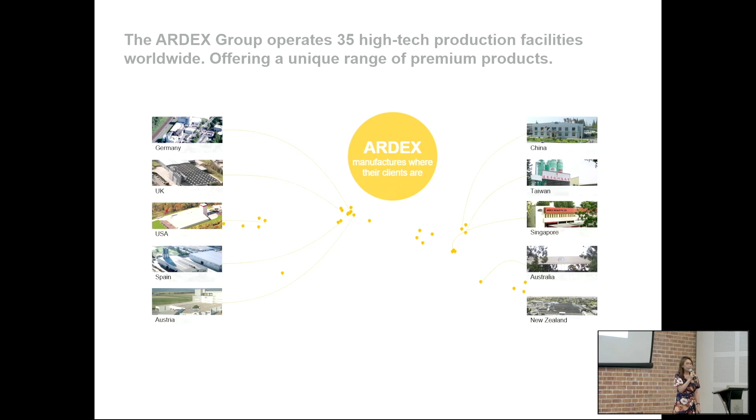These are our production plants worldwide - in Singapore and Malaysia we also have plants. For Southeast Asia, other than Singapore and Malaysia, we also have a production plant in Thailand. Under the ARDEX Group we have 18 brands, and ARDEX is one of the brands, while Quickseal is also another brand that we are promoting in Southeast Asia. So that's about ARDEX.

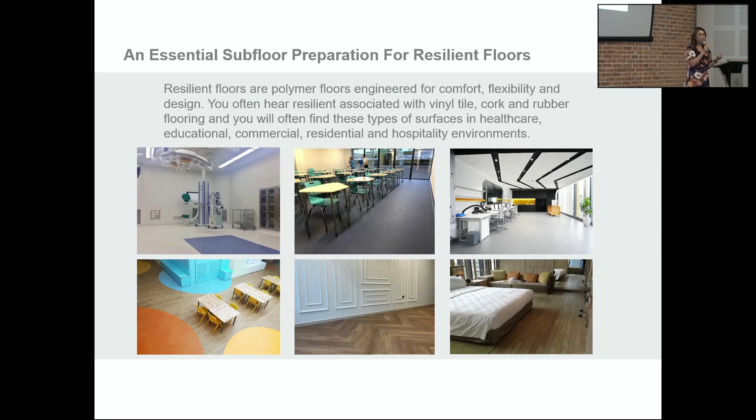Now we will move into the subfloor - what is this about the ARDEX flooring system? When it comes to resilient flooring, usually we think of those subfloor coverings like carpet, vinyl, linoleum, or even rubber, used most in industries like healthcare or institutional settings. But at this point, at the current market trend, vinyl has been widely used not only for healthcare, but also in residential, hospitality, or even commercial projects like office spaces.

For perfect floor covering installation, you need good surface preparation. You can have a very expensive flooring, but if you don't have good subfloor preparation, it may lead to failure.

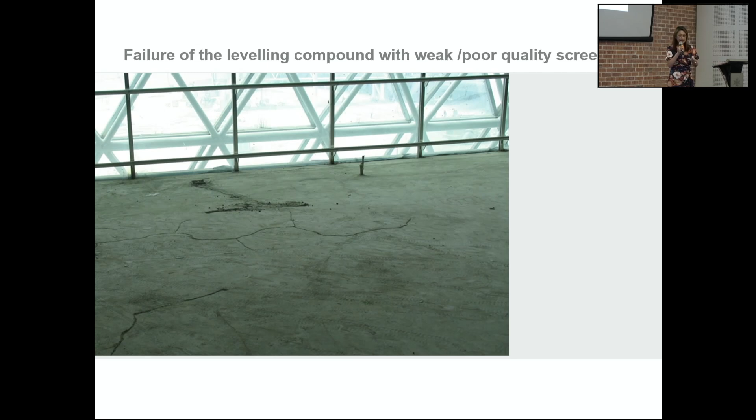This is from the airport project I've shown, the subflooring they had before they laid the vinyl. All these cracks and undulation make the flooring surface uneven, and it will cause potholes after some time.

So there are 5 key factors that we should consider before we lay the resilient flooring.

The first is that the substrate is flat. You need a flat subfloor. When we say flat, it also considers in terms of sound, non-hollow, and free of contaminants, which must be removed. The subfloor should be firm and stable.

Whichever flooring has cracks and holes, it should be repaired before you conduct subsequent receiving of the floor covering.

But all these factors can be resolved easily, because they can be seen from the physical condition when we visit the job site.

But the last point I'd like to highlight is about moisture. When it comes to moisture, it may not be visible to your naked eyes, so you have to engage a flooring specialist to check whether the subfloor is dry or wet.

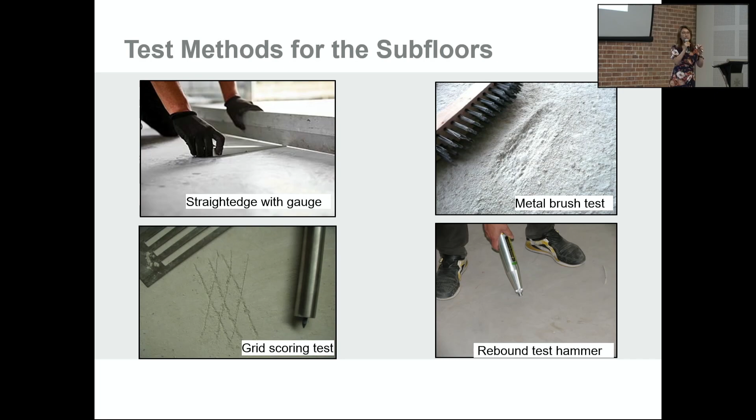This has to be engaged by either the installer or the flooring specialist. They should be equipped to do such inspection before they accept or lay the floor covering.

For ARDEX, we are a flooring manufacturer that produces self-leveling materials for our clients. So in order to have a successful installation of your flooring, the surface preparation is really important. You must have a solid and...

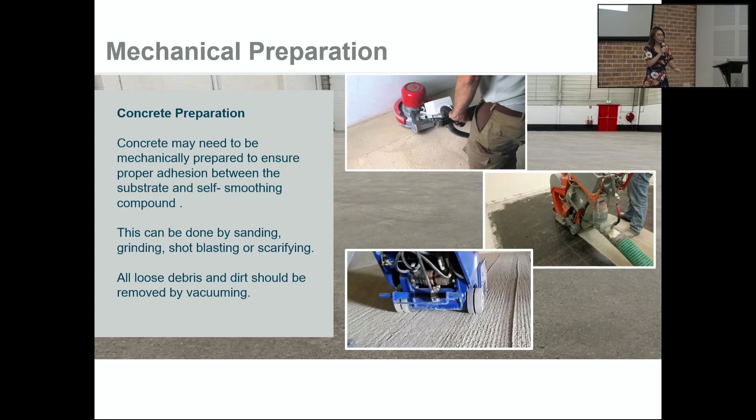Okay, so we will talk about the cement sand screed. I think this is a common component that will be seen whenever you deal with flooring installation. For floor screed, it's actually suitable for all kinds of application. It could be a coating installation, tiling, or wood flooring installation.

But all this has to be done according to the floor covering manufacturer's instructions or guidelines. In Southeast Asia, I suppose the bonding screed is the most common screed topping, or how we actually prepare the subflooring. Or maybe I'm wrong, but I suppose it's a bonding screed. What is this bonding screed? It's actually a screed topping material that will adhere or sit onto your concrete slab with full bonding.

And in some European countries, they actually have another type of screed called unbonded. With this kind of unbonded screed, they will use it when the concrete slab is, how to say, lightweight. When you do the unbonded screed, you need a thickness to have the full loading points. For the bonded screed, the minimum thickness is only about 25mm.

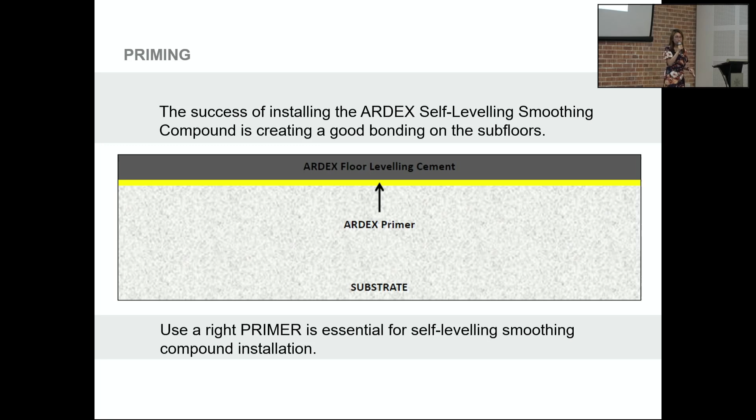It's not meant only for self-leveling, but when it comes to epoxy, PU, whenever you do a thickness of 1 to 2mm, sometimes you will find your floor with all these pinholes. It's because your floor is not being sealed. So sealing the floor will help give you good adhesion and prevent the moisture suction. All this pinhole issue is due to moisture suction.

Also, it will help increase the flowability whenever you are receiving cement, epoxy, or PU coating. It will also help whenever you have a surface that is sealed with the primer - it will help to have a more consistent drying of your cement finish or even the epoxy or resinous floor coating.

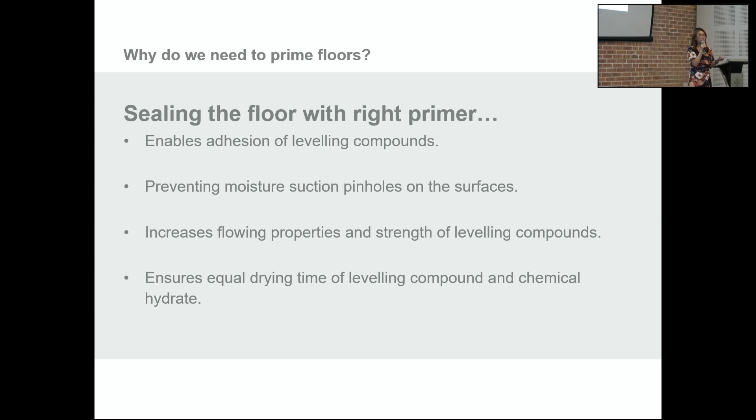So once you have primed your floor, you may need to know whether your flooring is dry or has a high moisture content. For checking whether the floor is structurally sound or has good wearing hardness on the surface, it is easy to check. But when it comes to moisture, you can't see it with your naked eyes, so you may need the test equipment to check your subflooring.

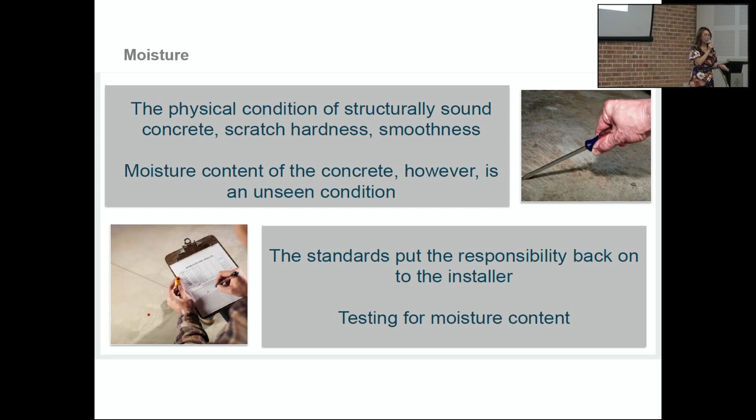Whenever you go to a place like an enclosed room or basement, definitely the moisture, the RH, tends to be higher compared with open space. So all this check will be taken care of by the installer.

So always check, measure, record, keep the moisture content results, and show them to your client. If the floor has high moisture, you will have this issue - your floor covering will be blistering, or the joint will be lifting up.

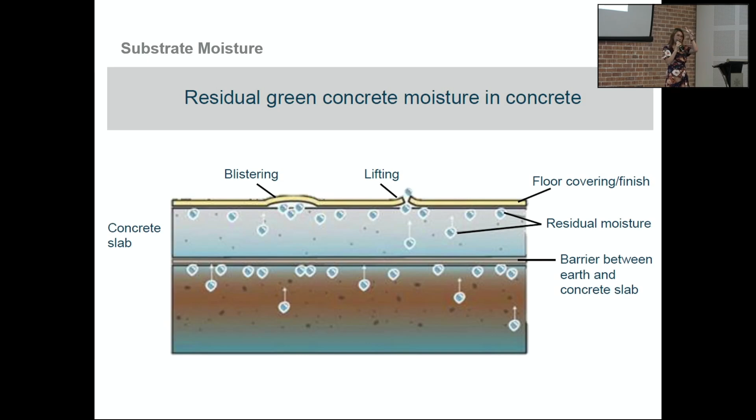But whenever you have the concrete slab or screeding, because the material uses water to mix, the moisture will evaporate during hydration. So if you don't have a dry screed, then the moisture will try to find a way to escape out. If you are laying your floor covering too early, you will have all these issues. So if you don't have time, you need the moisture barrier coating or solution.

Yeah, so this is the vinyl sheet seam joint failure due to moisture. You can see the joint actually lifting up, or you will see the bubbling on your subflooring.

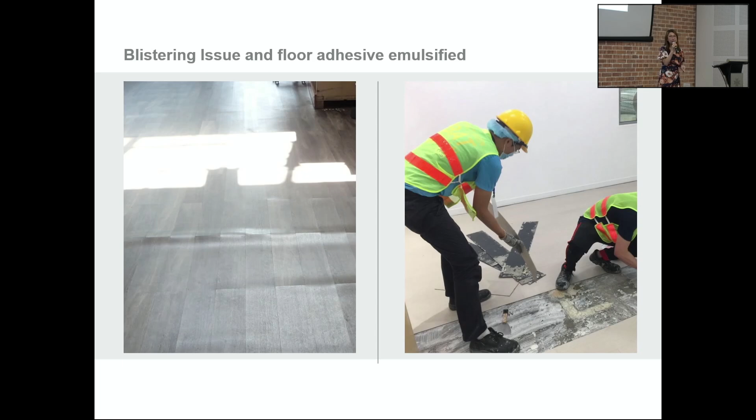And all this floor covering is installed with acrylic water-based adhesive. So if you have excessive water or moisture, this will be the problem - all the adhesive will get emulsified. So these are the problems, and we are here for the solution.

We need an effective moisture barrier coating system that can resolve your problem, be installed and protect your soft floor covering. With this moisture barrier system, it helps to suppress the moisture vapor transmission. It's not a waterproofing - you still need waterproofing whenever you need a waterproofing product. This is a moisture barrier system.

So it also acts as a hydrostatic pressure resistant waterproofing membrane, but for hydrostatic pressure. It's to prevent water seepage, dampness, penetration through the interior floor or wall, preventing moisture from the negative side. So with this moisture barrier, it will also help to reduce and eliminate efflorescence issues - it acts as a barrier.

So these are the basic things we should consider when laying the floor finishing. As I mentioned, we need a concrete or cement screed before installation, and you need a dry floor. This follows the British standard that you need not more than or equal to 4%, or the RH within 75%.

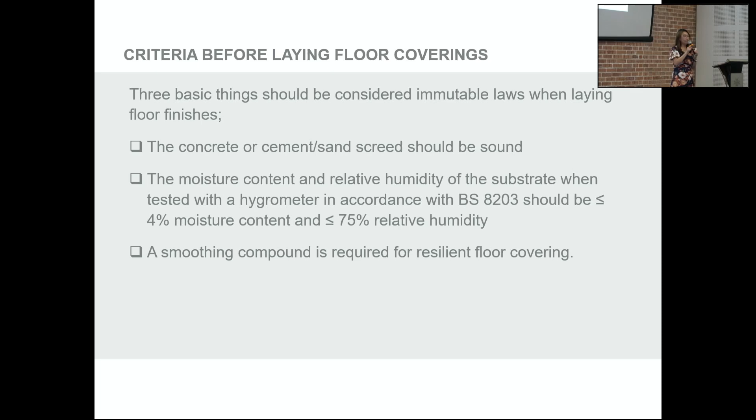So if you've already resolved the screed, you have a perfect screed and a dry floor, then you need a leveling compound. Why do we need leveling compound? This is also according to the British standard that we need a flat, smooth surface when it comes to finishing, or for receiving another floor finishing.

And there are 3 classifications. I believe all of you are familiar with this floor regularity, surface regularity requirements. So there are 3 classifications, and we have SR1. SR1 is how we actually measure to understand the performance. This is where we use the straight edge, the 2-meter straight edge, with the gauge, so you're able to check the difference from the edge and the floor surface.

So whenever you find there's a 3mm difference, do you think we still need to level the surface, or is it good enough? In actual fact, you still need to have a topping, the leveling compound, at least 5mm, to correct the surface flatness.

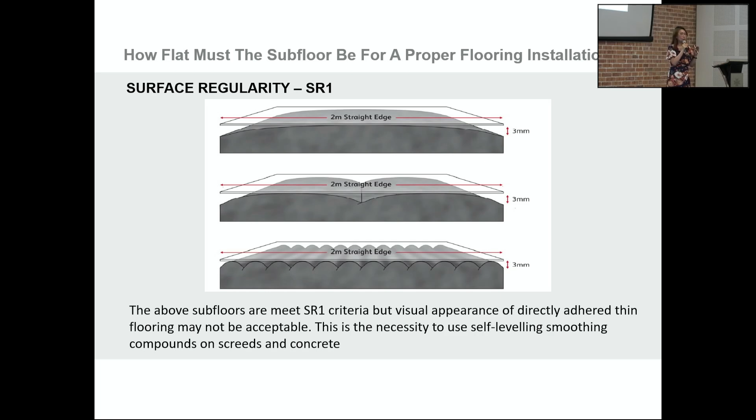So this is the scenario where you already have the SR1 surface. You think 3mm is not so critical, right? You think it's the best floor standard already achieved, SR1. But when it comes to this site condition, if you're installing a 2 to 3mm vinyl, you will see all this undulation, waviness on your surface. So this is where the self-leveling material plays a very important role as a product or solution to your projects.

So I keep saying self-leveling, self-leveling. What is this self-leveling? Is it a product that self-levels itself on the surface? No. Self-leveling product is actually a polymer modified cement that has very good flow properties. I believe you all remember the photo I showed with primer and without primer - with the primer, the material can actually spread evenly onto the surface. So that's how we describe the self-leveling product that has very good flowing properties.

With these flowing properties, the cement can provide a level, flat, smooth surface. This is where you need this product to support your resilient floor, to get the greatest performance. So it's ease of application - the product comes in a bag, you just mix with water. At the job site, in this area, you may need just 3 to 4 people to do the installation, and it requires less labor.

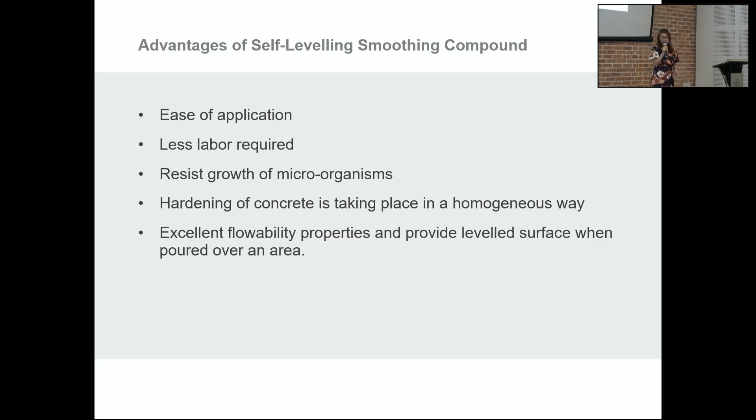So again, with this good flowability property, you're able to provide a level surface when poured over an area. And this is just a simple process I'll show: we need to surface prime, prime the surface. Then we get a bag of the leveling compound and mix with water, and the product will be poured onto the prepared floor surface.

Then we just use a trowel, or we also have some tools that help speed up the work and installation, so you don't need to bend down or kneel down to do the installation. You're able to finish this floor within maybe 2 to 3 hours. So it's also a cost saving to your client.

So this is the importance of this self-leveling compound. It helps to prevent the wavy unevenness of your flooring, and actually prevents the unsightly view or aesthetic of the surface. You can see this on the left top.

Wherever you have excessive wear on a high spot, you'll tend to have a lot of abrasion. So after some time you may find your floor looking like the right top of the image. It will also prevent the risk of cracks and potholes. Even with a very tough flooring finish, it may still cause cracks or potholes over your floor covering.

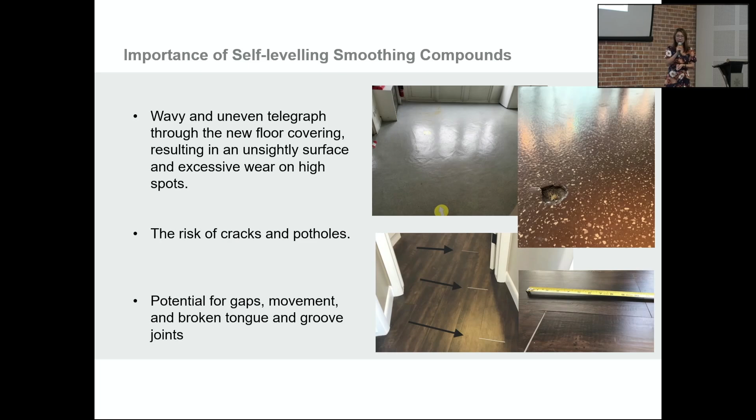Also when it comes to LVT, you may have the potential of gaps between the LVT, or maybe wood panel, wood plank or LVT plank, due to movement. This may cause the tongue and groove of the LVT to break. So these are the problems you will see if we don't install the right product on your floor surfaces.

So why are we here? Because we are German. The self-leveling product we use is based on German technology. The product is very versatile, able to receive all kinds of substrate, like concrete, wood surface, tile surface, or even metal surface. It has very good surface coverage, with minimal consumption, good flowing properties, and self-recovering.

This self-recovering property comes into play during installation. If the product doesn't have good self-recovering properties, whenever we do a trowel pass, it may leave a trowel mark on your surface, and this will cause unevenness again, creating more lines on your floor surface.

So whenever you are installing a thin floor covering, it may also reflect onto the surface. Because we use a special engineered polymer material component, it helps to have very low tension and shrinkage on the mortar topping that you are laying over. It dries fast, and even though it's by hydration, it's able to open for foot traffic in a very minimal time, like 2 to 3 hours.

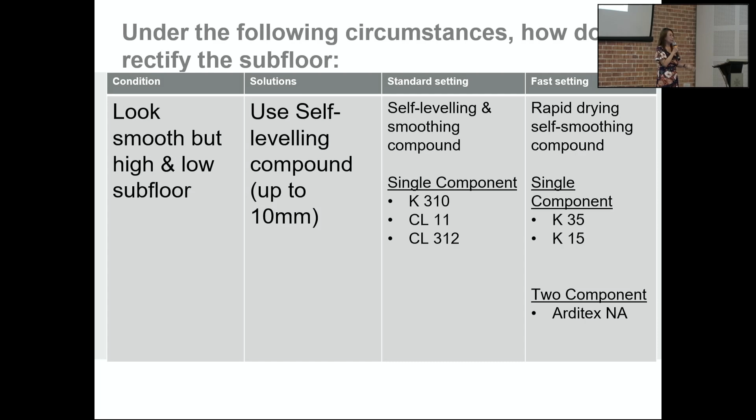You can actually use the self-leveling material, and the product can be applied in one application up to 10 mm. We have a standard setting and a fast setting. With the fast setting, you are able to complete your job within a day, and install the floor covering the same day after laying the self-leveling compound.

And if you have a rough and uneven surface, you can consider this self-leveling screed, or what we call base mix. You can apply it up to 35 mm without weight, same as before. After 6 hours, you are able to allow for foot traffic.

So if you are installing a thinner floor covering, like 2 mm, we suggest you go with another layer of self-leveling material to create a smooth surface on top of the self-leveling base mix.

We also have a product for when you need to treat depressions caused by hacking or some repair work. You can either use the same leveling compound added with some additive to create a paste form for touch-up patching, or we also have a product where you just mix the material with water as a fast-drying patching mortar. I'll show this in my later slides.

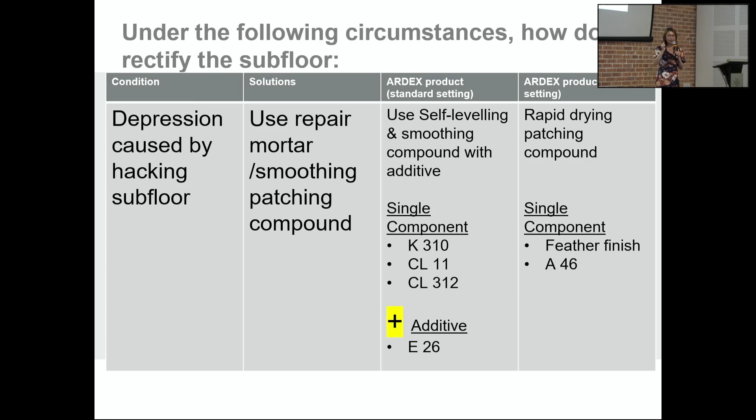So this is an undulating floor, due to poor screeding work done. We actually have the material for this—again, it's a base mix—that allows you to speed up your installation, your project, with minimal time.

Okay, so the last condition is when your floor has cracked or is hollow, but you don't have time to re-screed. We have the solution for you. You can actually use epoxy, the resinous solvent-free product, to treat the flooring or consolidate your floor with the epoxy material.

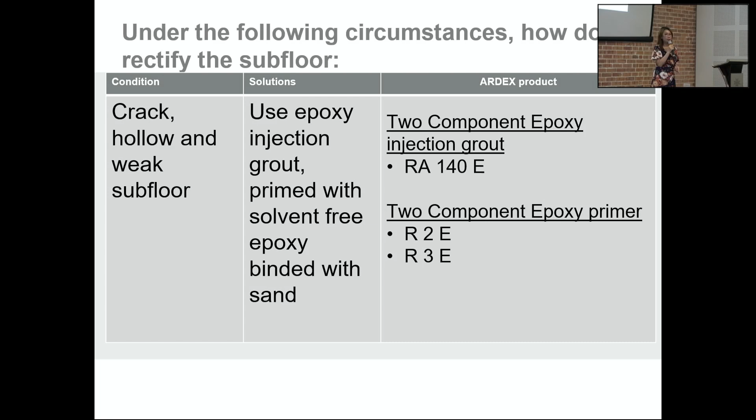Okay, so the flooring parts we already finished. Now I will just quickly run through about the flooring adhesive. In the market, this adhesive is used for vinyl, rubber, linoleum, and wood flooring.

In the market you may see the most common adhesive being used will be those water-based acrylic, and modified silane polymer, which is quite recent technology. But even though it's already in the market, some of you already know about the MS adhesive. This is also used for those LVT or rubber for semi-exposed areas, but because it comes in one single component, it actually helps to speed up the job.

In the past, when it came to external installation, they may only recommend epoxy or PU base adhesives. But with this modified silane, it helps a lot because it's able to have quite good performance as a resinous PU or epoxy adhesive. So the two-component adhesive is still widely used, especially for external applications or even wood flooring, solid wood, or engineered wood. They may still go with the PU adhesive.

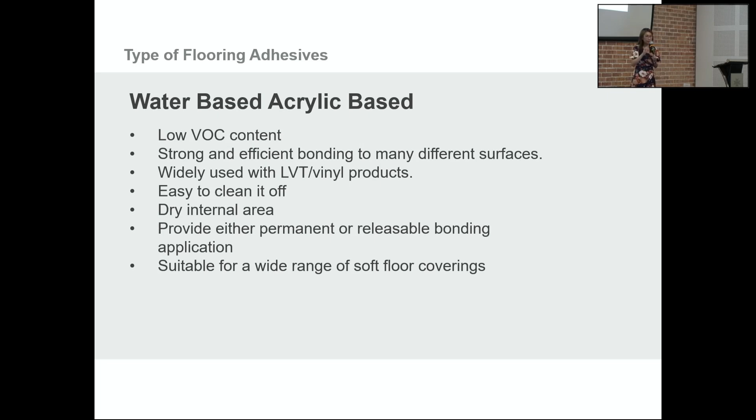And for this water-based acrylic, you can actually have two methods of installation. Either it's wet set, which provides a permanent installation bonding application, or you can have this releasable method, which means after laying the flooring adhesive with the floor covering, you're still able to reposition, or replace it if you think there is a defect onto your LVT. This releasable bonding application allows you to do a replacement or change, like with a carpet.

So this is the modified silane polymer base. It's one component, ready to use. As I mentioned, it has very similar properties to the PU or epoxy resin adhesive. You can use it outdoor, semi-outdoor, or in high solar condition, heat, because it's weather and moisture resistant, and you can also use it in the bathroom, a wet area. Also, it gives a very low VOC content that is suitable for a wide range of floor covering installation.

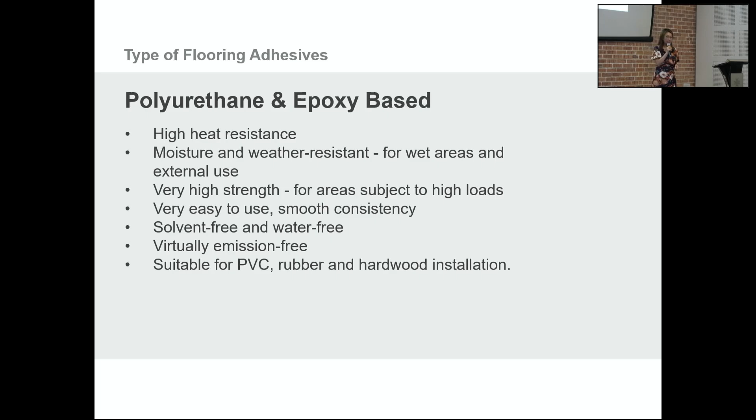So the PU epoxy always comes in two components, and it's also moisture and weather resistant, so you can use it for external and wet areas. The difference is you need to mix the two components to have a chemical bonding. If you just use one component of this, it won't be cured. So this is much more on the heavy duty side when it comes to heavy duty usage.

Yeah, so these are some checklists, but always when it comes to flooring adhesive recommendation, you will actually get guidance from the floor covering manufacturer. They will have a guide for you when it comes to specification writing. But as an adhesive manufacturer, we also have knowledge for the recommendation.

So if you have a project, you can just let us know what type of floor covering you are using. From there, we are able to advise you on the adhesive to use.

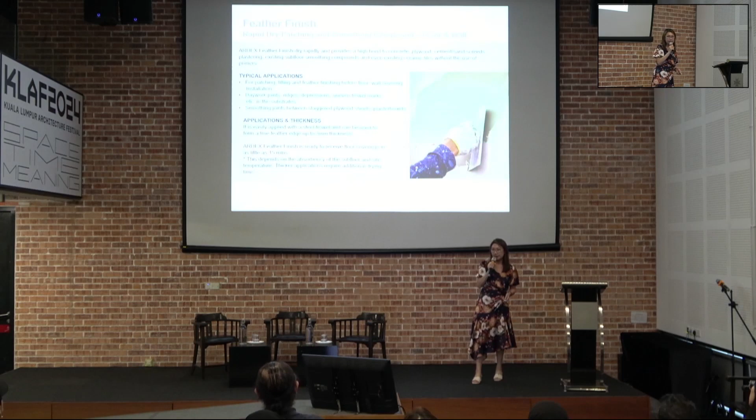So this is the patch and repair product. This is used for depression areas where you have hacking, or maybe your floor, the self-leveling material, is not installed the right way, which means you don't have a good surface, or you never primed the surface well, so you find a lot of pinhole suction. You can use this to patch, no need to relay the self-leveling compound. This is the product you can use to resolve pinhole suction areas.

So we also have another repair mortar. This is a rapid hardening material where you can do the installation, repair and resurface. And in a quick time, you are able to continue receiving painting or coating over the surface. You can actually use this product to build a ramp, because this material can be installed from 2 to 30 mm in one application.

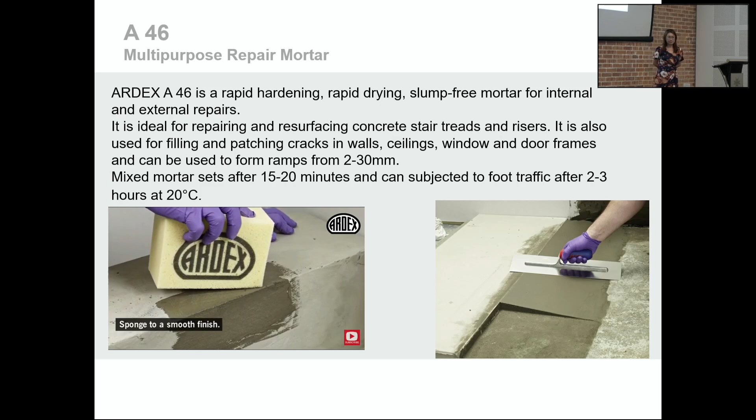So it's a quick repair method and solution. It dries pretty fast. Within a few hours, it actually gets set and dry.

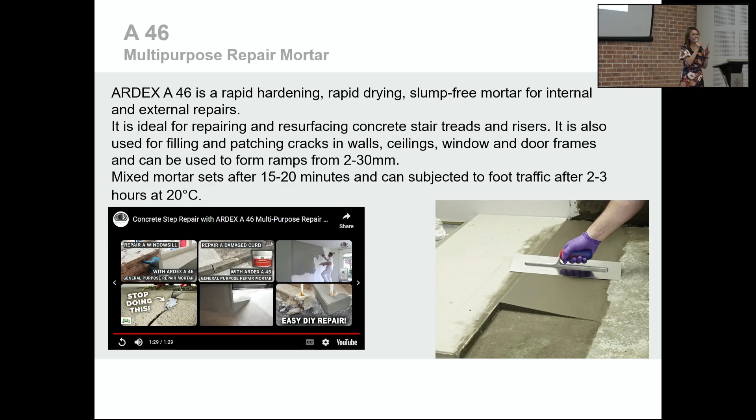And you can actually see this product. You don't need any primer, but you still need to surface prepare the area to have a good bonding.

Okay, so I think the last part I would like to share is about the case study we have. It's about the moisture problem that we actually helped our client with, this moisture barrier, to resolve the moisture issue that they have.

There are 2 projects. Actually, one of the projects we are proposing the WPM 300, which is an epoxy bridge bonding coating. Also, this is a two-component material. It's a water-based material that is safe, also used for waterproofing for the potable drinking water tank.

And it can be applied to a damp surface, okay, or freshly laid green concrete, because the material itself is able to suppress the moisture vapor from the surface, and it's also a green certified material.

And we have actually worked on this Sigma project, and the client has come to us directly, where they have a laboratory, about 2,000 square meter project in Singapore at this Biopolis. They have been doing the screed for 2 times, and they have wasted 6 months. The main concern was not being able to deliver the project.

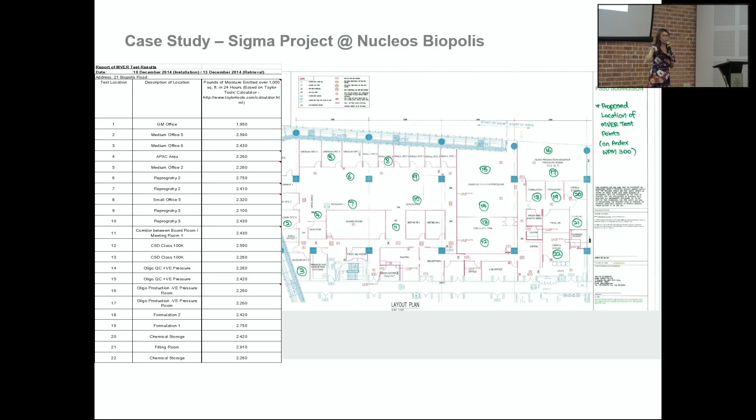They had, I think, 22 points over the 2,000 square meter. So after laying the WPM 300 system, we helped the whole entire floor achieve below the standard 3 pounds emission, moisture emission rate.

So actually, if you can see from the right top image, the right side image, all the readings are actually below 3 pounds. This is the MVER standard, where they need the rating results to be below 3 pounds.

So before that it was actually 5 to 6, but after laying the moisture barrier, it actually helped to suppress the moisture from the screed. And we also wondered why the screed could not be cured even after 2 months. We found it was because the water table surrounding was pretty high, and also because under the floor is actually a server room. They have a 24/7 aircon on. So it was all these factors that caused the screed to not be cured and dry, and it was always in a wet condition. That's where we came in to help resolve it.

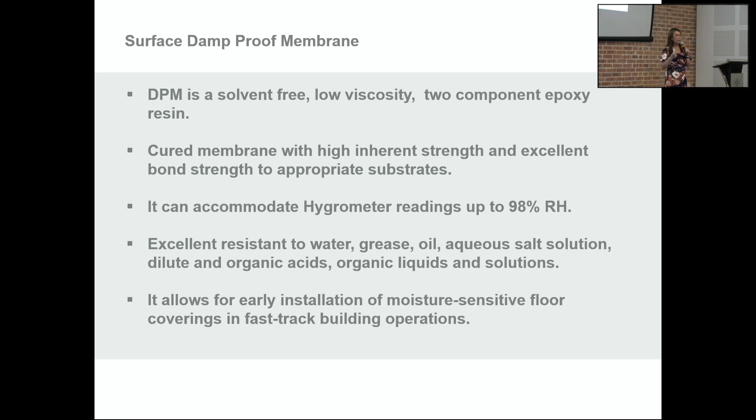So this is more for where you have a very high RH or higher moisture content on the subfloor, you can actually go with this material. And it's also a chemical resistant product, because it's solvent-free, in terms of performance it's definitely slightly higher than the water-based type. So this is the project case study that we have in this Tetra Pak office.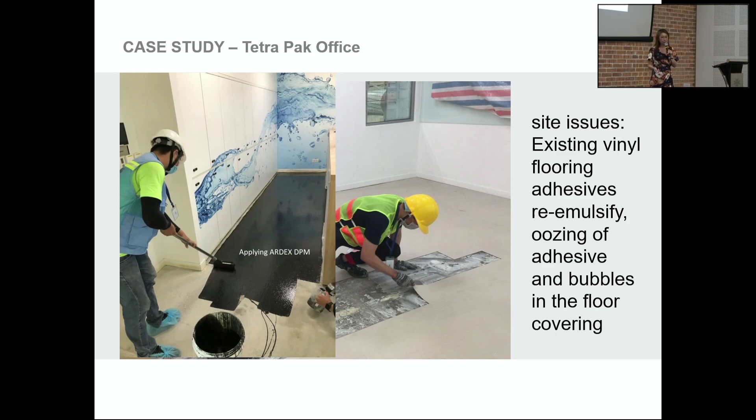So that's where we actually came in to help them resolve it. We applied the DPM over the subflooring, and we relaid the leveling compound after this damp-proof membrane. With the damp-proof membrane, it actually helps to resolve and suppress the moisture from the ground. This project's flooring is on the ground floor. The moisture is basically from the screeding where they cast, and they don't allow curing time.

Okay, so this will be the last part of my presentation. I will share some project references that we have. What you have seen is basically projects from Singapore, but we are also present in Malaysia, where our Malaysia team has worked with our customers to supply our leveling compound flooring system to most of the healthcare projects in Malaysia also.

So you can see this is the Woodlands Health Hub. It's the largest project that we had in Singapore for the healthcare industry. Maybe for Malaysia it's not that big, but for Singapore, 120,000 square meters is considered big for us. I'm not sure what's the usual project size in Malaysia, but this is considered the largest healthcare project we have in Singapore.

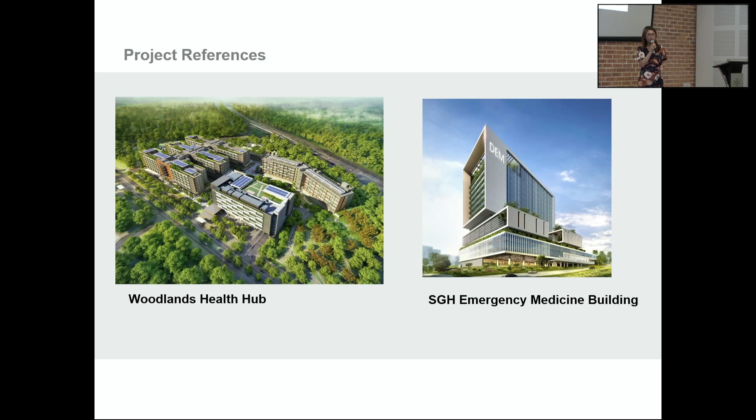So we also supplied the SGH emergency medicine building - this is about 6,000 square meters. We have Sengkang General Hospital, also about 60,000 square meters. And National Heart Center is also about 45,000 square meters. The full floor solution is from ARDEX. So Outram Community Hospital Integrated Care Hub is also using our system, the size is also about 45 to 60,000 square meters.

Other than healthcare projects, we also supply our flooring system to commercial projects, like Tekka Place - this is a shopping mixed development, a shopping mall combined with residences. We also supply to the Shopee office with the vinyl flooring system, and IKEA. And also this will be a museum recreation project industry, the Museum of Ice Cream. The flooring is using vinyl.

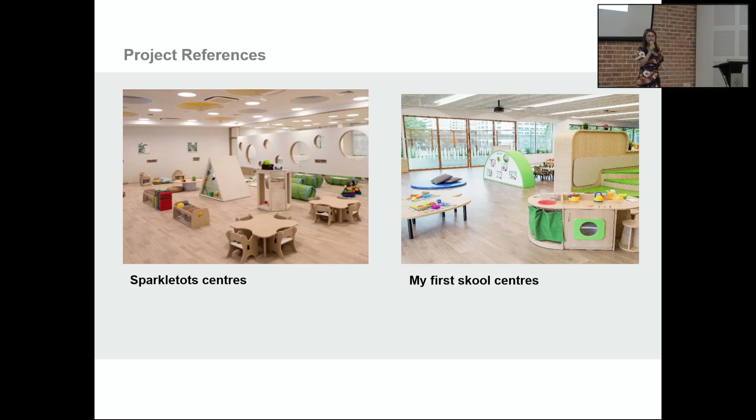Okay, and we also supply to educational projects. We are actually for the childcare - it's island-wide for all the Sparkletots centers and My First Skool centers in Singapore. We also supply to the Canadian International School for the new kindergarten wing. And we also work on hospitality projects, hotels, where now LVT wood flooring is the trend for hotel projects.

So, yeah, this will be the summary. To summarize, we need a flat, smooth surface to give the greatest performance on your resilient flooring. It will give you a very solid foundation, and it will prolong the floor service for your projects, because it gives you fast, repeatable, reliable performance on the flooring. So you need a smooth and level substrate in order to achieve a very flat, mirror-like finish on your projects.

So that's all. I think the Q&A will be later, right? Yeah, can. Thank you very much.

Thank you, Ms. Emily. I think we give another round of applause to her. The interesting thing about it is the scale that she mentioned about Singapore being 6,000, very big. And Malaysia, I think, is the size of Sekolah Menengah and Sekolah Rendah. So we should be grateful - actually we do a lot of big size projects also, but not of that quality.

So can we proceed with the lucky draw? Okay, I hand it to you. So who is going to pick? Okay, you select, then I read the number. How many do I draw? 8, is it? Okay, how many? No music, huh?

Okay, nice handwriting. Mazli Lajis, Architect Reka Consult Sdn Bhd. Can you come forward? Oh, he's up there. Oh, he hasn't arrived yet. So should we read the second one?

Then we proceed. Okay, I forgot this is an architect event, so everybody has good handwriting. So the next one will be Muhammad Ashraf alias HSA Architect. Then the third name, very simple, Zaid, GSD Architect.

And the fourth, Muhammad Fikri bin Muhammad Saga, Muhammad Saufi, Johari Architect. He's here. Wow. Next time we should sit at the top.

All right, the fifth, Mr. Lee Tiong Ki, L3 Architects Sdn Bhd. Okay, the sixth, Mr. Ui Ai Keng, AK Ui. Wah, this one the boss himself gets it. The seventh, second last, Jane Lee, Miss Jane Lee, MOA Architects. Oh, again on the top.

Architect Chan Seong Aun. So I think when I was sitting just now, our senior architect needs no further introduction. If you look there, he is a president of PAM 2013 to 2015, right? So I think if we have a very, very senior architect talk about Gen Z technology, which is BIM integration, the first word that comes to my mind is you have to listen, because technology is the most resilient knowledge. Talking about COVID, post-COVID, pre-COVID, a lot of people talk about the only industry that shows the most resilience is adopting technology.

So let me read, besides becoming a past PAM president, I will read as a protocol: Architect Chan Seong Aun graduated with Bachelor of Architecture Honors and Master of Architecture Distinction from Victoria University of Wellington, New Zealand. He has more than 20 years of working experience as a professional architect and is founder of the firm Architect Daya Seni Sdn Bhd.

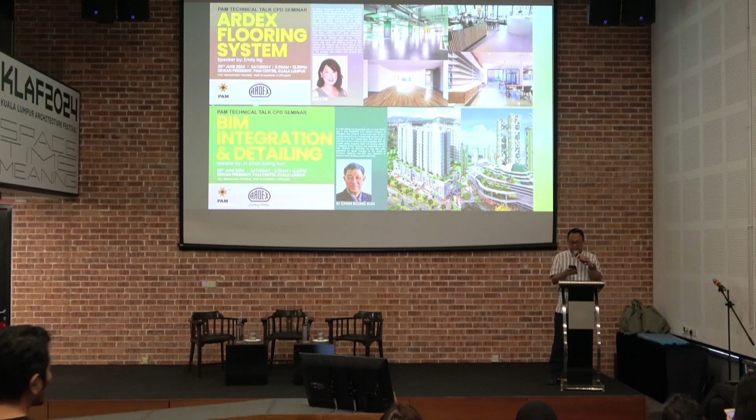Any of your staff here? Oh, okay. So no wonder there's a lot of people, it's free.

As principal architect of ADS, he has completed high-rise condos, hotels, shopping malls, and housing projects in Malaysia, China, Vietnam, and Indonesia. He was past PAM president 2013 to 2015. He has also been appointed a board member of the Board of Architects Malaysia, Lembaga Arkitek, LAM, 2011 to 2021, and president of Malaysia Green Building Council, MGBC, 2019 to 2020.

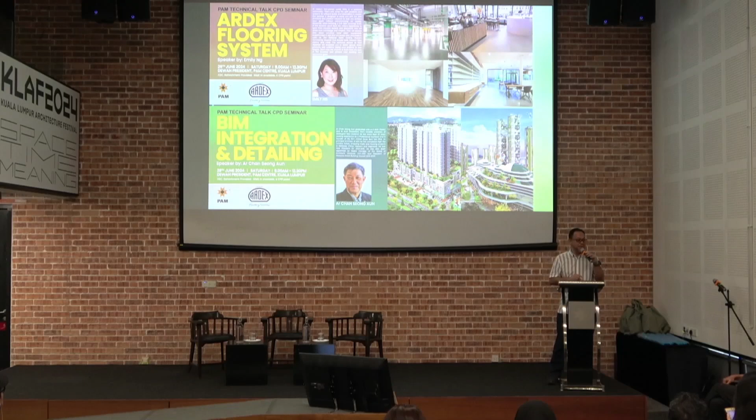So I think he has long established experience. I very much like to hear your talk also, because the title is integration. So that is the one we need to share. We no longer talk about BIM alone, we talk about BIM integration. So what is the definition of integration and detailing? Only Architect Chan will be able to inspire you.

So I do not want to talk a lot about the synopsis, I think everybody should know that. Sometimes a lot of comments come, we talk too much about awareness, BIM 101, BIM 101. So we have him today putting together integration and detailing. I hope it will inspire all of you to embrace more of BIM as a supplementary service to your fee, because BIM is actually able to produce additional fee for ACP.

So hopefully, Architect Chan, you have the floor to inspire all of us. And then after that, we get another lucky draw. So I keep insisting a TV, so hopefully our audience won't run away because of that. Thank you very much. Okay, Mr. Chan.

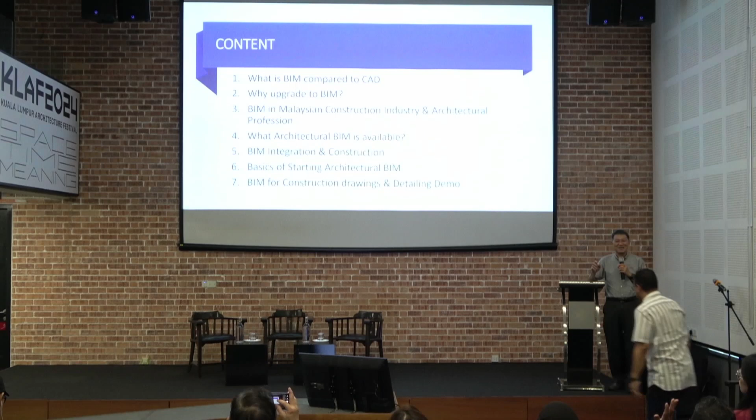Okay, this is the content. I've just covered what is BIM. I think maybe before we start, can I have a show of hands? How many of you have bought the BIM program and are using it in the office? Can you put out your hands for me, just to have a quick look. 1, 2, 3, 4.

Oh, okay, it's like the industry standard, 20% is already using the BIM, and the other 80% still undecided, want to go, don't want to go.

I can understand also why. In today's economic climate, BIM is not cheap. Price is, I think, 8 to 10,000 a year, just the one license alone. So I think you all understand also.

So maybe before I start, I better make a disclaimer. The seminar I express here is purely my own view. I don't want to get PAM into trouble.

Because there are a lot of issues many of you are facing today, especially medium, small offices also caught already now. Autodesk likes to write letters to you - we understand that you have been using my license, my software without license, please send me a list of all the software you have in your company, I want to audit it. So straight away I gave it to my...

IT manager - now I have an external IT source. He maintains my server and also my computers, so he put a nice big firewall in front of my office already now, so anybody who wants to get in also not so easy already. Last time they used to try to track us, I think they are still tracking us right now to this day.

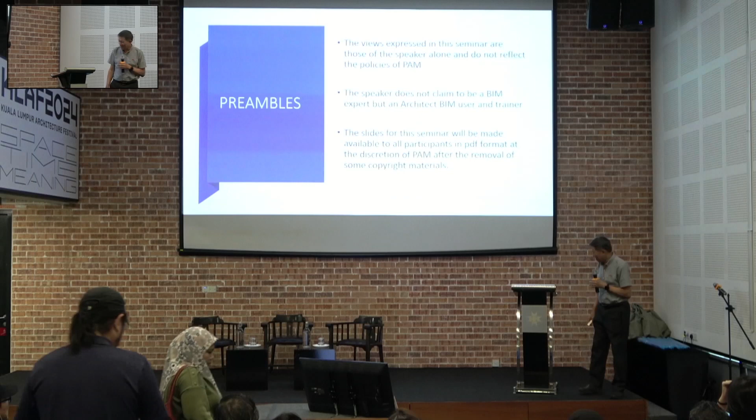Clients approach me, then they say, I want - because this JKR project, JKR wants a green consultant, they want the project must be run on BIM. Their idea of BIM must be Revit only, anything else is not BIM. So very funny. So what happens? The client employs a BIM consultant, so a BIM consultant will do all what he does.

His BIM is even older than mine. My Revit is 2020, I think. That year, they stopped supporting the perpetual license. Now they are only supporting the annual license. So mine, they wrote me a nice letter saying, sorry, we regret to inform you, your version of Revit is no longer supported by Autodesk. Wow, very good - if you surrender your license to me, I'll give you 1 year at 50% discount at $7,008.

I said, wow, very kind of you - I pay you $12,000 for the thing, you surrender your license to me. I have around 6 or 7 other Revit licenses. Unfortunately, last time I wasn't smart enough, I put it into a normal computer. So when the computer dies, or you want to upgrade the computer, you have to go back to Autodesk to get the key, the license key, to reactivate the license. Why? You write in, call, make a donation to you. Perpetual license, it's just thrown away like that. So that's how they make money off you.

So the other thing I want to say, I have to explain to you - I'm not a BIM expert, okay? I am a user. I started using Revit, I think version 2009 or something, sometime around that day, around 9 to 12.

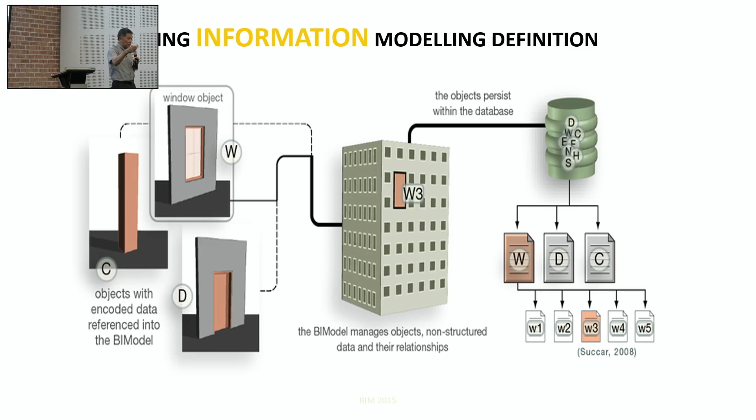But you will see later, building objects encoded and embedded have an interwoven relationship and hierarchy that describe a building of some sort. These are the key components - you can see all the key components, then you got W1, W2, all that. Everything is very well organized - it's a structure-based thing. Okay, so what is not BIM?

AutoCAD is AutoCAD. Normal AutoCAD is not BIM. Even 3D AutoCAD is not BIM, because it's not made up of components or objects. It's made up of points, lines, surfaces, and solids only. So typically SketchUp, Autodesk 3D, 3D Studio Max, all those are not BIM.

Let's be clear about it. It's not BIM, so you cannot do a lot of things with it. You cannot cut section properly - you can cut section, but you'll see it's not solid, all made out of lines and surfaces only.

There are different levels of BIM information nowadays. People who don't know will start talking about 3D geometry as number one. 3D, then 4D is time - you can put that in. But now we also don't even use BIM to the full already.

5D is the cost estimation. One very important thing about BIM - because each object has got properties, you've got volume, size, everything - you can actually extract all those properties and put them into a table, and export that table to Excel. If the QS is kind to you, you can give it to him, and he won't need to extract quantities manually.

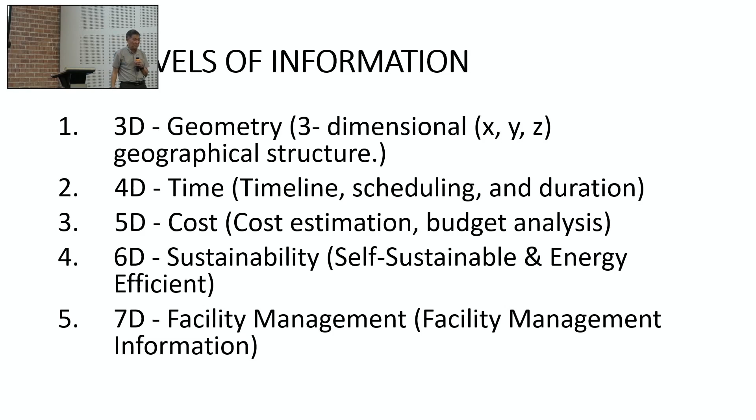Of course, the last one is the FM information. If you give your model to the owner, and if you've got an MEP working with you who puts all the components in there, they can extract the maintenance schedule out of the BIM program. That's the last part of it.

So what is the evolution, so to speak, over the last few years? As you can see, with paper, it took us 3 to 6 months to finish one set of drawings, talking about a housing scheme or landed housing scheme - this is manual design. If you go to AutoCAD in the 1980s, we have 2D electronic drawings, dots and lines, taking between 1 to 6 months.

What's the key component of that increase? Accuracy - very important. Last time when we did a layout plan, we couldn't get an accurate one because when you scale too big, the size gets out of hand. Then from the 2000s to 2020s, Autodesk 3D started coming in - surfaces, objects, that's SketchUp.

As far as the current crop of students is concerned, they are still stuck in the 2020s. To move into 2020 to 2040, we have to start looking at BIM already. This one is 3D solid modeling - all the objects. What I mean by objects: for example, a staircase is an object.

You can add in the railing, what height you want. You can even tell the program, in the latest versions, what bylaw you want to follow, and it will make sure overhead clearances are correct - typically when you draw AutoCAD sections, headroom isn't enough, things clash, the riser is too high or too low, staircase railing isn't right. So with objects, you have endless variety and selection for you.

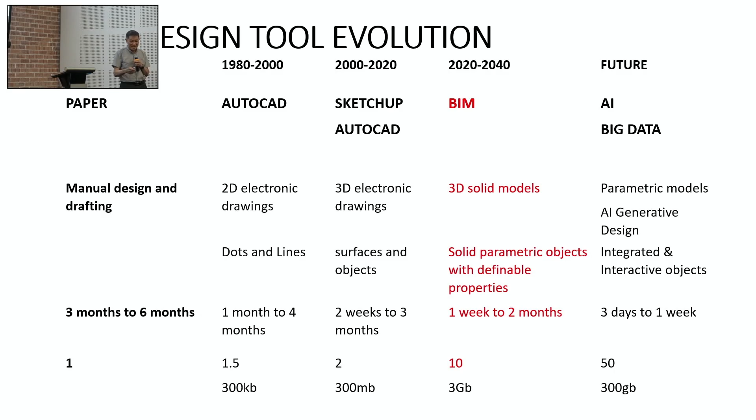The latest trend right now is AI coming in already - very frightening, that one. They're starting to integrate AI into BIM, and there are a few other developers besides Autodesk - Autodesk doesn't develop, they only buy. They recently bought a program from another company in Europe called Spacemaker. You can run the video and see.

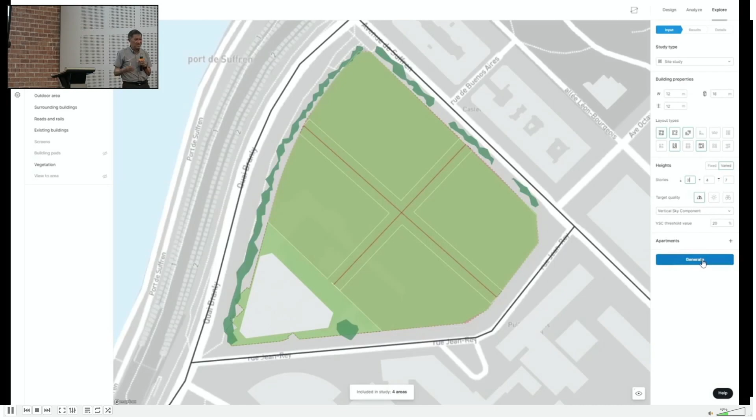Sometimes you look at it, it's already happening at the planning stage, so you can imagine how fast you can attack it. Okay, this one you see, they just do the road - you get the track, you take it from Google Maps. They just scale it and put the road in, then you tell the program how many apartment units you want, what's the floor area, how many room sizes you want, and then it will start to give you millions of different options.

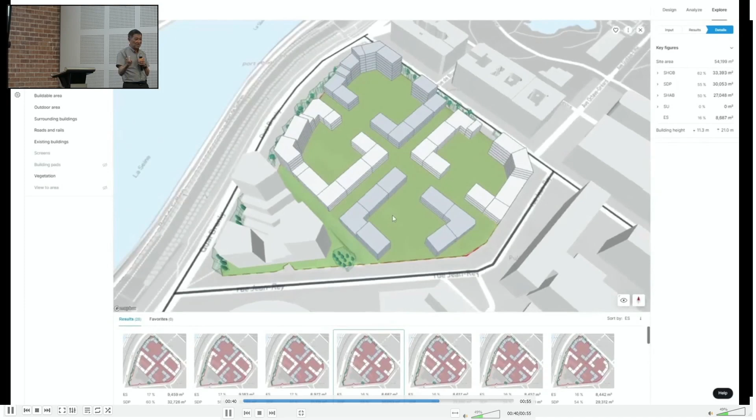From there, the block model can be exported to Revit, and then from Revit you can start to develop the model. I think this is also an annual license - they are currently under testing, but it's still an annual license thing.

And I was told in Europe, a lot of development firms are already insisting that you must run something like this, including the cost element inside, because they can run 20 to 30 options to balance where the cost is best. So I think in the very near future, things like this will begin to happen to us. So if we are not willing to invest into BIM, at least we must know what is available, and then you can sub it to other people.

Like for example, a lot of design-build JKR contractors now already have so-called BIM consultants. They take your drawing, convert it into BIM, and then submit it to JKR. So this is how they operate.

So why upgrade to BIM? I think the benefits will be, of course, the key one is the integration - the integration of the design, the coordination. You don't have to worry about the coordination because when you do big projects, the section and elevation always have mistakes, because they cannot tally with the plan. With BIM, you don't need to do that already - everything is automatically generated by the program itself.

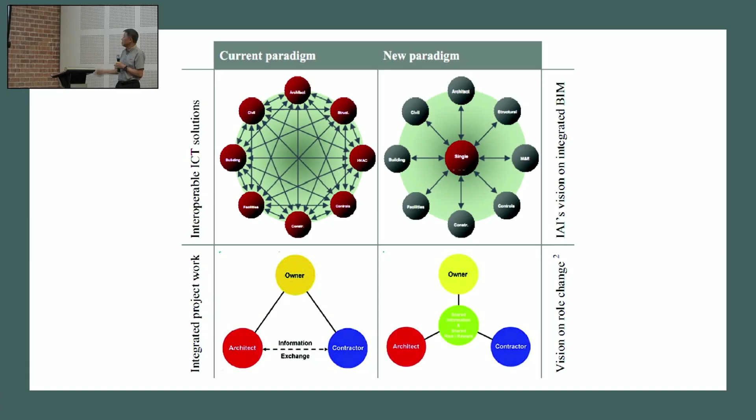Productivity increased 5 times. Why? Comprehensive integration of information - your cost data, all your detailed data, everything is within one file. There's a lot more information inside the BIM drawing, because if you're doing AutoCAD 2D drawing, you only get lines. Everything has to depend on your specifications - material, quality and quantity all depend on your specifications. With this, you can put that into your BIM program already.

There is the ability to offer a wider range of services, because if you have developers who are also design and build contractors, or if you dare to take the risk as an architect and form your own construction firm, that's the way you can offer services better - you do design and build.

Unfortunately in Malaysia, the new generation of buyers still have the mindset that design is free. Why do they think design is free? You have to ask yourself that question. Because when they buy a car, they didn't pay the designer for the car - the car price is there, it's like that, no designer fee.

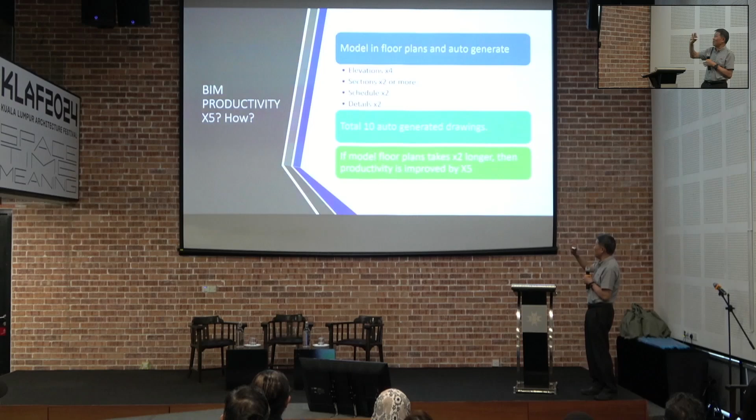Ability to offer wider services expands the customer base. So why is it 5 times? Typically you prepare the floor plan - in any BIM program we always start from the floor plan. Floor plan is the key.

The only difference is when you do the floor plan, you're already drawing the floor slab, and you start to add the components in. Once you finish the model, elevations no need to draw anymore - just point the direction and the elevation generates. You can even cut through everything, and do 2 or more sections for free. Maybe the floor plan takes 2 times longer, schedules 2 times, details 2 times, but you auto-generate 10 over components from your BIM program. So if you double the time for your floor plan, you halve the time elsewhere - it's easily 5 times productivity even though it takes 2 times longer upfront. That's why I say your staff's productivity will easily increase 5 times.

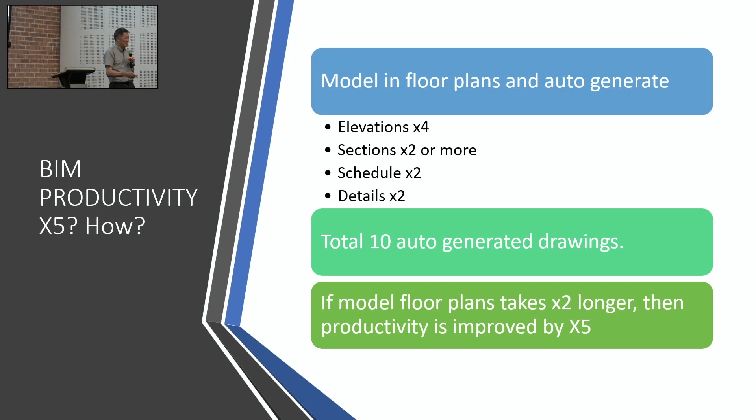Maybe you don't want to, they don't care.

Challenges to BIM automation include lack of readily trained staff, high cost of BIM software, high cost of upgrading in terms of time, and no budget for BIM investment due to COVID-19 and economic slowdown. Clients also don't want to pay extra. But last time when we changed to AutoCAD, clients would not pay extra, saying just do it faster and I'll give you the same price.

I don't do government projects, so clients do not require BIM. But it's not about whether the client requires BIM or not, it's whether you as an architectural firm can improve your profitability by improving your productivity. Remember, productivity gains were only on the construction, specification, and tendering process part. Also, you reduce the amount of mistakes you make. These are the key things you need to remember.

To differentiate your company from your competitor is to do an outstanding job. How you gather, manage, and use information will determine whether you win or lose. This is from Bill Gates during the Microsoft era. Now he's a bit left behind too.

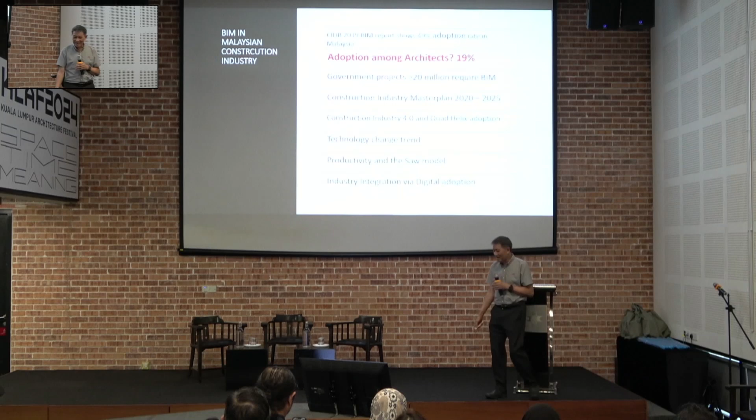This is just to let you know what's happening in the market. If the model gets too big, it's very easy for it to get corrupted, and when it suddenly corrupts, that's a panic. Let's look at the construction master plan, Industry 4.0, and technology changes. The SAW model is what I was talking about, when you move from one model to another, you start to lose information. So if you start with BIM from the beginning, you don't have to worry about that.

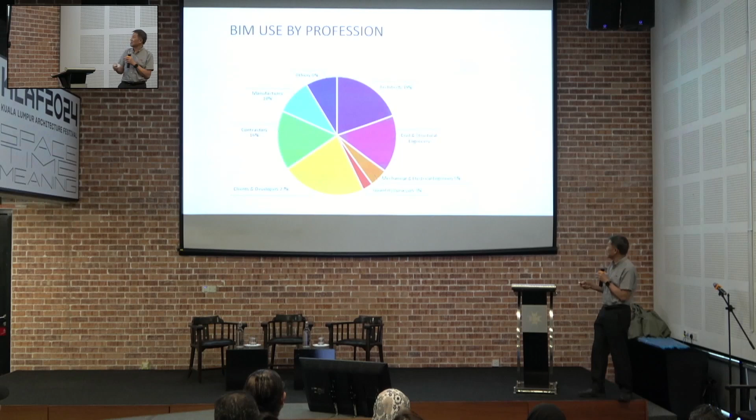Large organizations, then you have medium, 51 to 200. The larger ones are the ones because they have the budget to do it. Most of them have the budget and the manpower. They're willing to put the money in.

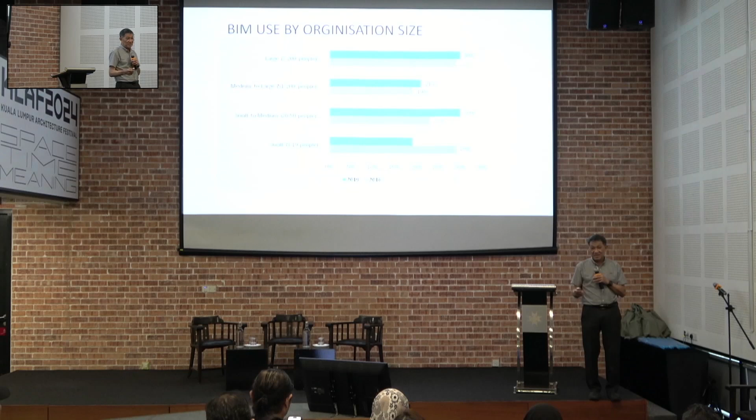Medium to small, that is about 20 to 50, also about 30%, surprisingly. Then the smallest ones, actually, if you ask me, are the ones who will gain the most. Why? Because if you don't have draftsmen, you have to do the drawing yourself. If you have to do the drawing yourself, isn't 5-time productivity worth your effort to learn?

So, what are the programs currently in use? Of course, Autodesk is still champion, number one. Navisworks actually is just a checking program.

Trimble SketchUp apparently in Britain is quite popular. It's not SketchUp, it's Trimble SketchUp, but I don't know whether they've started to fully develop the thing. Tekla is actually a structural program. In Europe, it's similar to what's used in Malaysia. So you have...

Graphisoft's ArchiCAD, which is the most architect-friendly of all the BIM programs, I just say. The others are there too, like Bentley. So I'll show you some of the other programs.

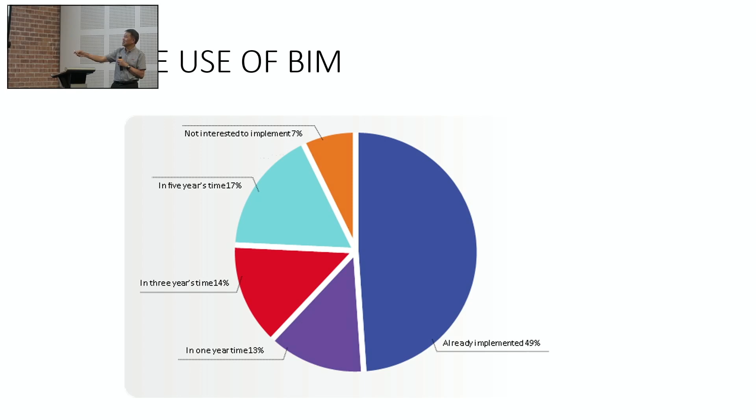Already implemented 49%. You can get this from CIDB's strategic plan for Construction 4.0, 2021 to 2025. This shows the integration of BIM. Worldwide adoption, I think the US is still the leading country, then Europe, China, and Australia. Most companies are already using some sort of BIM program at least.

Available software - I'll show you not worldwide availability, but what's available in Malaysia alone. If you want worldwide, you can explore yourself. Autodesk Revit is still number 1. Graphisoft is number 2 in Malaysia. Bentley EcoSim is another.

Nemetschek Vectorworks is another one. Nemetschek Allplan - these two, 4 and 5, are actually from the same company, the owner of Graphisoft; they already bought over Graphisoft. So numbers 2, 4, and 5 are from Europe.

Rhino BIM actually isn't a program itself, but an add-on to the BIM program. SketchUp PlusSpec is the one I showed you earlier. ArchLINE XP and ArCADia BIM, these last two, are available from a dealer in Malaysia, but they're actually European-based programs.

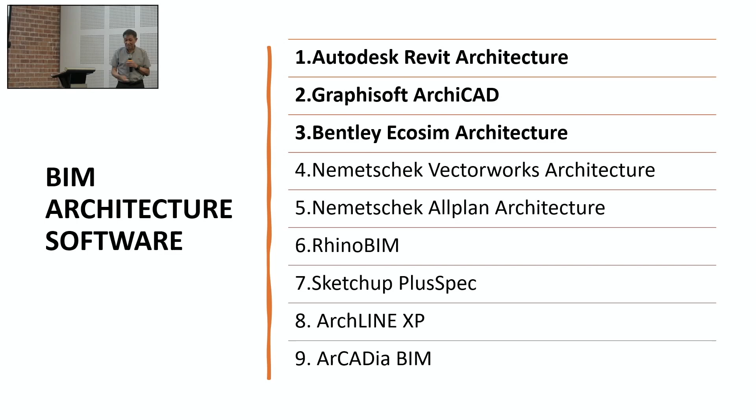Structural software sometimes needs to integrate into your BIM program. When you give it to a structural engineer who already has a BIM program, it's easy for them to run it - they treat it like a black box, but they still check. They take your whole model, strip it down to the RC structure or steel structure they're using, then run the analysis like a black box, but still need to check. Then the BIM program generates all the column and beam schedules, bar sizes, and other details.

The most popular structural program in Malaysia, I think, is still Tekla Structures. If you go to any steel manufacturer, they're still using Tekla - a lot of them. Bentley is mostly used by structural people doing infrastructure works. Autodesk Revit Structure, somehow, isn't popular among Malaysian engineers, but Tekla is very popular.

Unfortunately in Malaysia, M&E engineers are treated very badly - they get the lowest fees. I've seen projects where they're squeezed until their fee is lower than the quantity surveyor's, because the quantity surveyor sits next to the owner every day talking money, and the owner wants to hear that. They're not interested in 'you've got M&E problems here and there, solve it for me, and I'll give you the 50 cents you're worth.' That's what they're thinking. Because they're not paid well, where's the money to do development and buy BIM software? Very difficult, and it's very unfortunate - Malaysia, that's the way it is.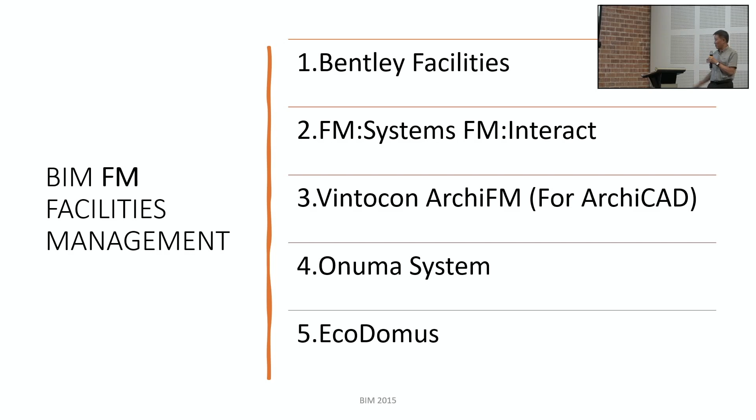BIM program company comparisons. This one is not my own review, but I take it from a program called Capterra Reviews. So we're looking at ease of use, value for money. I think value for money is their decision, you will be the one who makes your final decision. So I only compare programs which are available, license type and price, training, and the program features.

Arcadia Soft, Archline XP, ArchiCAD, and Revit. These are the four I try to recommend because these are the ones most readily available.

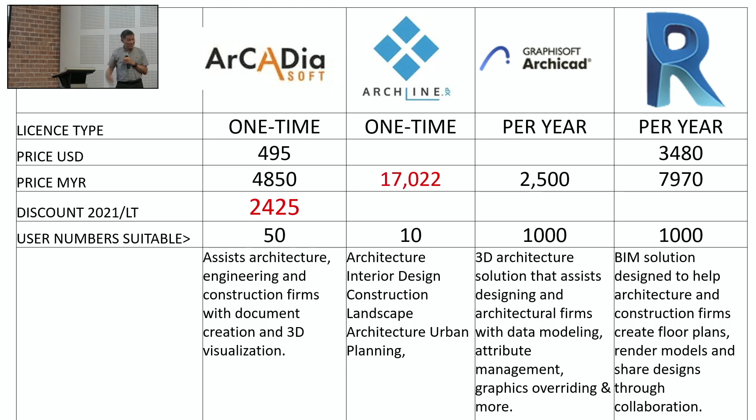So these are the webinars, whether they're available or not, and then the documentation, all those you can see for yourself. Important thing is sometimes people ask me, hey, why don't your whole office change to BIM? Because sometimes you're squeezed in terms of time and training, so you take baby steps, one step at a time, slowly. You learn it, then you teach, learn it, you teach.

So strictly speaking, I can continue to use this for the very high-end projects. ArchiCAD BIM will be the one I start to adopt in the next few years because it's within my budget. I buy it cheaper than a full Autodesk 2D. The interface is like IntelliCAD, similar to AutoCAD but not exactly the same, so there is some learning curve there.

Contract management, everybody knows, you can see 2D drawing, 3D images, bill of materials, all those are there. Everybody's got this. Project management, only these two have it, the others don't have it. Presentation tools also have it. The important thing is...

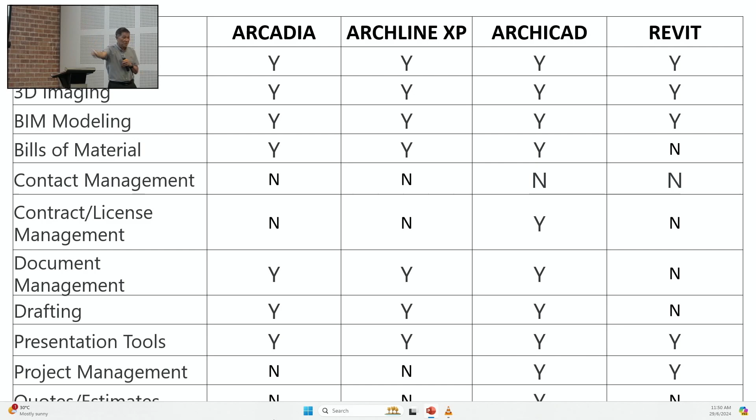Programs like ArchLine and ArchiCAD are smaller dealers, so they have a plug-in, you have to buy the plug-in, about $300-400. The plug-in then allows you to export your model to RVT format. The RVT format is very important now because if you're not interchangeable, you cannot integrate. So with your RVT format, if other people like JKR insist on running Revit, you give them the RVT model, so at least you have some answer for it.

Then maybe if your firm is big enough and you finally find enough budget, you buy a 1 year or 2 year license, then you can take Revit and keep moving. Because Revit, like all the other BIM programs, changes every year. When they change, the previous file you read already cannot go backwards, you can only use the new one. So I sometimes read it and get a headache. This is technology change, you have to adapt to it.

So explain, phone support, all that.

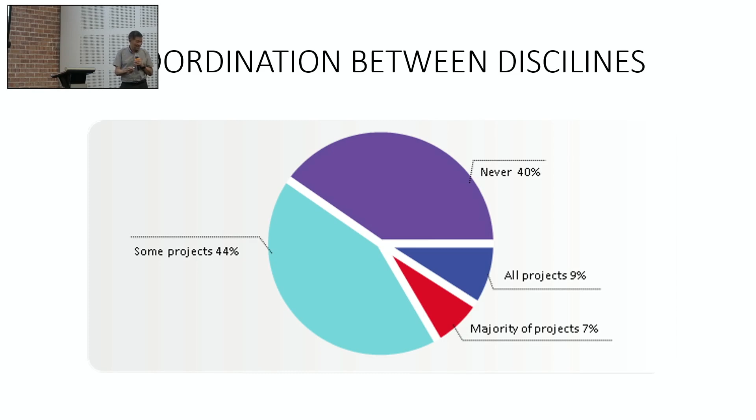They have a very similar interface to SketchUp, but not as user-friendly. Let's be frank about it. SketchUp is still a bloody good program, very good for doing sketch design. But when you want to move over to construction drawing, there's a bit of a big barrier.

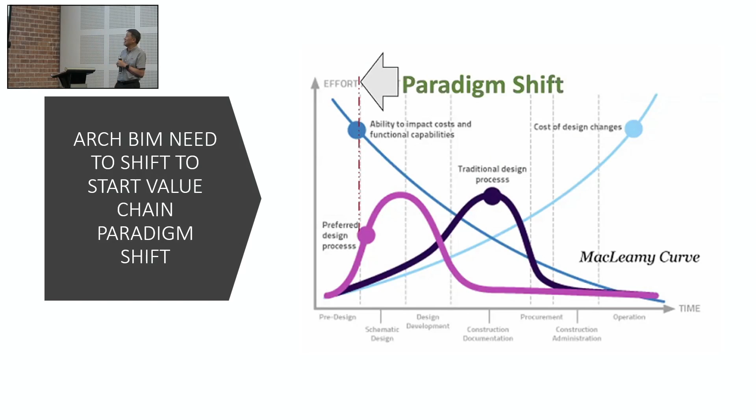So key issue, this one I won't go through in detail. This one is from the MacLeamy curve. You can see this goes from fragmented to integrated. These are the paradigm shifts. I think there's some more. This is the model I shared with you earlier. If you have a BIM model in the center, most people using it will be sharing a model.

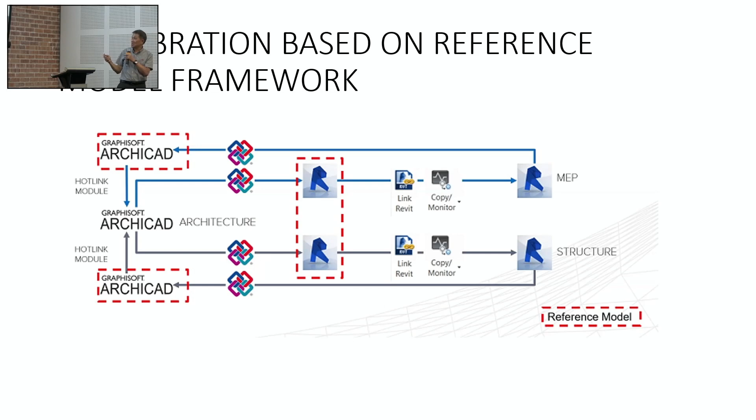Solibri is the coordinator program, Open BIM. So this is the example of one of the reference models developed and then shared among different consultants using similar software. I won't go through the detail with you.

Transformation on 2D operational, this one is independent system, silos. These are the different programs, you can see Tekla, everything is in there. Integration and licensing, client's computer, your computer.

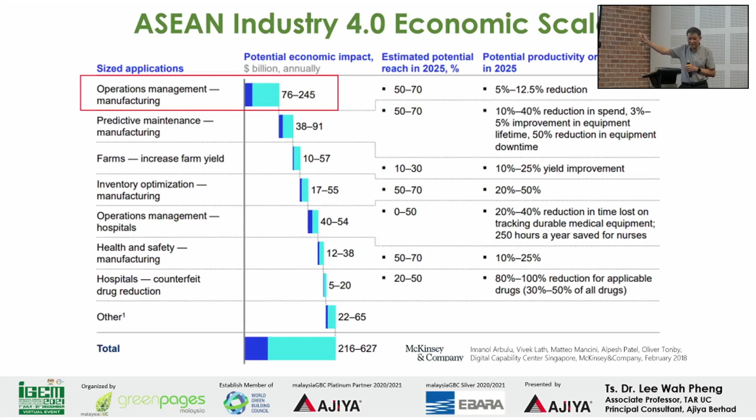Economic 4.0, so where is our adoption? The key one is the operational management for manufacturing they're talking about. Industry 4.0 awareness in Malaysia, we are at number one, two, three, four, five from the bottom there. Why? Because there's no digital talent to execute the roadmap. This is not my answer, this is what McKinsey said. No digital talent, what do we do?

Architectural basics. So user interface, commands, object navigation, project setup. Normally you need to set up the environment, the template. The best way to get accuracy out of your BIM program is to actually have a proper grid line, because everybody else has grid lines. So you set up grid lines, then you start to run your BIM model with basic BIM modeling principles.

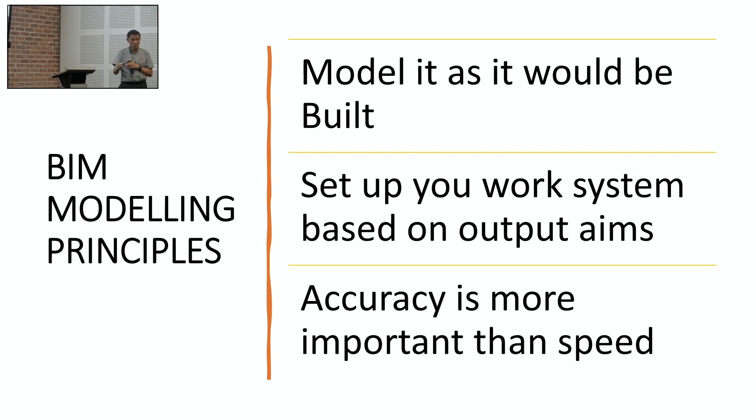Model it as you would build it, set up your work system based on the output aims, and accuracy is more important than speed. But speed is also important. Accuracy is more important though. So when you do your BIM model, make sure you have the accuracy there.